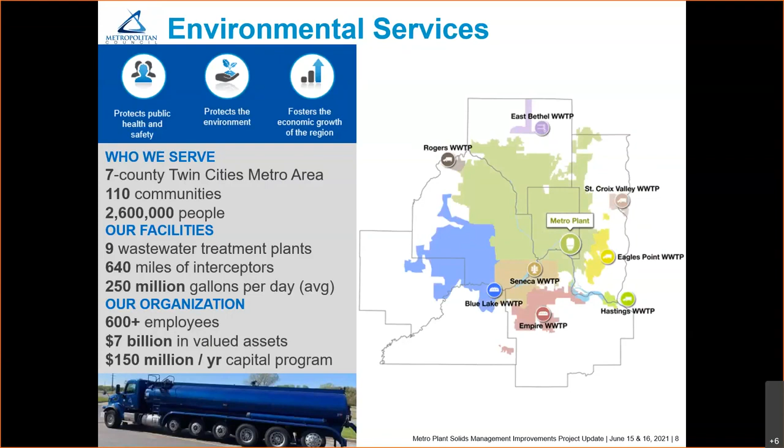The proposed project will be constructed at the Metropolitan Wastewater Treatment Plant located at 2400 Childs Road. The Metro plant treats 180 million gallons of wastewater every day, about 75% of the region's wastewater.

The Metro plant also treats about 850 wet tons of wastewater solids on a daily basis. It might be hard to imagine how much 850 wet tons is, so my staff did some calculations to help us visualize the volume.

850 wet tons is equivalent to 20 airplanes, 140 elephants, or 420 cars. The incineration process reduces the 850 wet tons of wastewater solids down to 40 tons of inert ash. The energy recovery system reduces purchases of natural gas and electricity by $2 million per year.

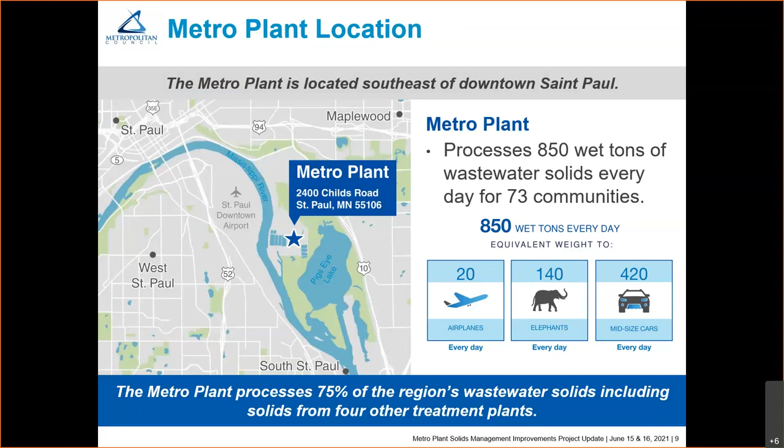The Metro plant needs additional solids processing capacity for 2 reasons: asset preservation and growth. In 2025, the existing incinerators will be 20 years old and in need of a very intensive renewal project. We estimate that the renewal work required will take about 1 year for each of the 3 incinerators. We currently do not have the capacity to take an incinerator out of service for a year. By building a 4th incinerator, we will have the capacity needed to renew existing incineration facilities.

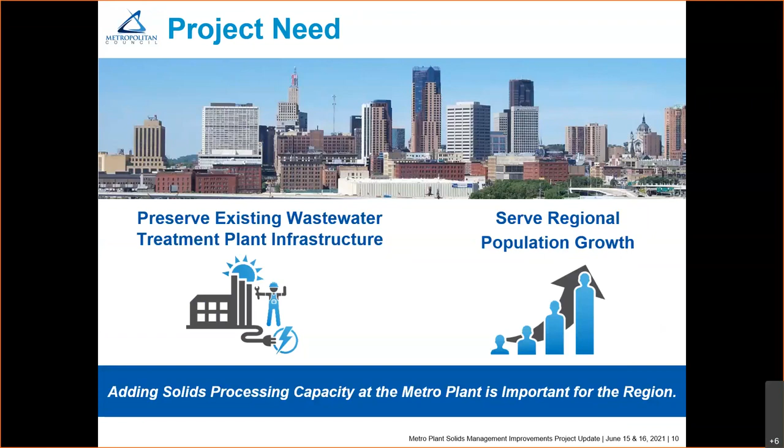Additional capacity is also needed to serve regional population growth. The population of the Metro plant service area is expected to increase by 500,000 people by 2050. While wastewater flows are historically holding steady due to water conservation efforts and reductions of inflow and infiltration, the solids generated will increase with population growth, and capacity is needed to treat an additional 215 wet tons per day by 2050. The region is growing, and MCES needs to support regional economic growth by maintaining state-of-the-art treatment facilities at affordable rates.

Currently, MCES is undertaking a minor capital project to address incineration equipment concerns. Beginning in 2024, MCES proposes to begin construction of a fourth parallel incineration train similar to our existing systems, with comparable energy recovery and air pollution control systems. An extensive renewal will then be completed on the existing incinerators 1, 2, and 3 from about 2027 to 2029. In summary, MCES will be spending roughly $200 million over the next 8 years on Metro Plant solids projects.

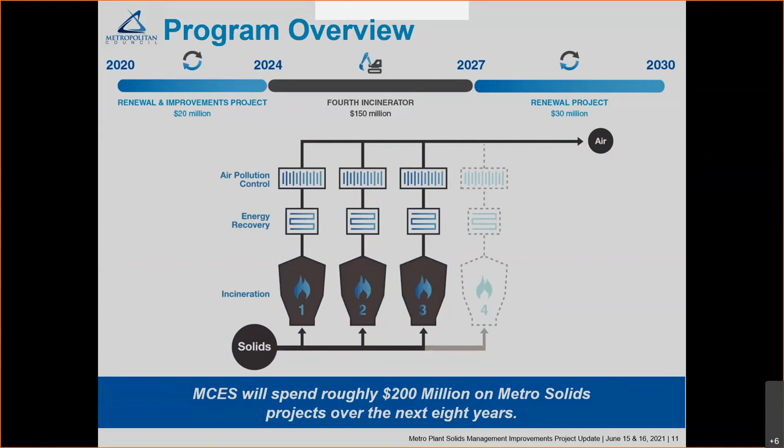Our proposed project includes expanding the existing solids management building by 21,000 square feet, as shown on this slide. The incineration equipment, shown in green, will be housed in the expansion. The stack for the fourth incinerator will be located at the same location and height as the existing 3 stacks, which are noted on the right side of the slide.

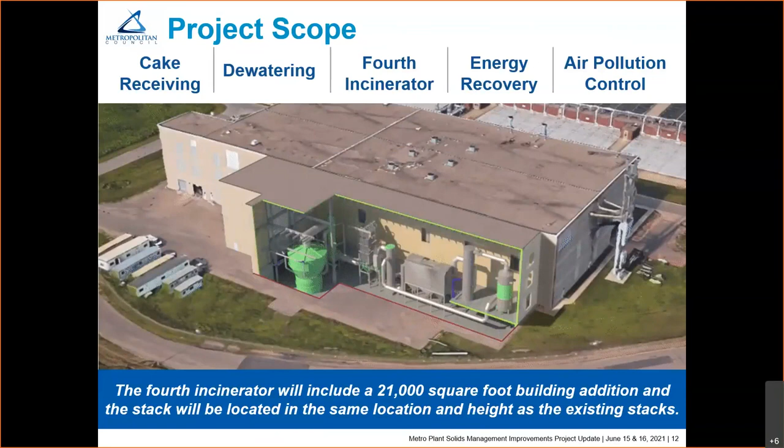The project will include additional dewatering facilities, a fourth incinerator, energy recovery including a new steam turbine generator, and air pollution control. The project also improves receiving facilities so that MCES can accept dewatered solids from the other MCES treatment plants on an emergency backup basis.

Significant outreach activities were performed in 2018 to local government entities, our customer communities, as well as our industrial customers, regulatory agencies, businesses around the Metro Plant, neighborhood districts in St. Paul, community organizations, and environmental advocacy organizations. In addition, over 4,000 mailings were sent out to residents surrounding the plant to let them know about the project.

MCES held an open house event and formal public hearing to receive public comments on the project. During the public outreach held in 2018, there were no concerns expressed with regard to odor, noise, or traffic. As part of the facility plan, an alternatives analysis was completed, which included cost and non-cost factors. The fourth incinerator was found to be the most cost-effective and sustainable alternative to meet the region's wastewater needs.

Following the public outreach and responding to the public comments, the Metropolitan Council formally adopted and approved the facility plan for the project in October of 2018. Later on in the presentation, I'll provide the address for our website where the facility plan can be viewed.

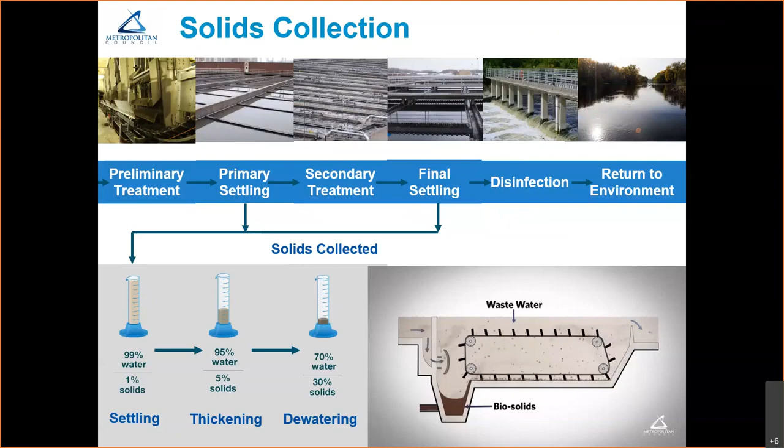The solids that are collected have a lot of value. After the wastewater solids are dewatered, they have a heating value similar to wood or low-grade coal. You probably don't want to throw our solids on your next campfire, but they do make a great renewable fuel source that is ideal for incineration.

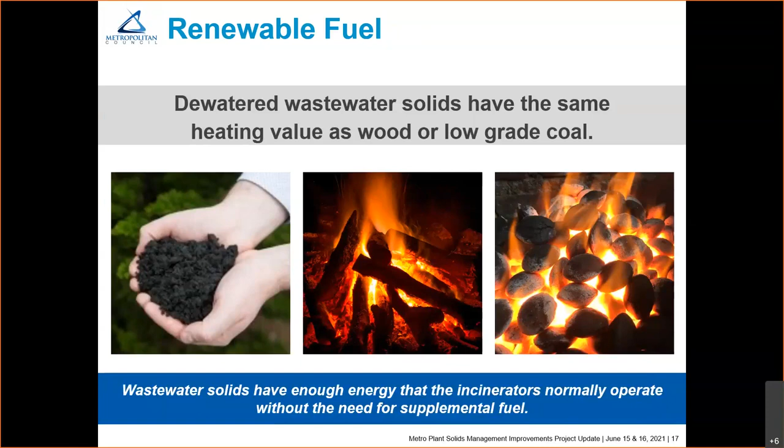At the Metro plant, we use fluidized bed incineration technology. A fluidized bed incinerator contains a bed of sand, and air is distributed under the bed, which causes the sand to swirl and act like a fluid, much like a boiling pot of water.

Once reaching a temperature of roughly 1400 degrees Fahrenheit, the solids have enough energy that the incinerators normally operate without the need for supplemental fuel. As long as the solids are fed, the combustion continues. The combustion of the solids releases flue gas containing water vapor, carbon dioxide, and fine ash particles through the top of the incinerator, which all go through further treatment.

Like Janine mentioned, MCES has to process 850 tons of wastewater solids every day, and one of the major benefits of incineration is that it makes 810 tons of that material disappear. After incineration, we're left with only 40 tons per day of dry inert ash, which is roughly 2 trucks per day. If we did not have incineration and had to add drying agents and other materials to control pH, we would end up running roughly 75 trucks per day from the Metro plant.

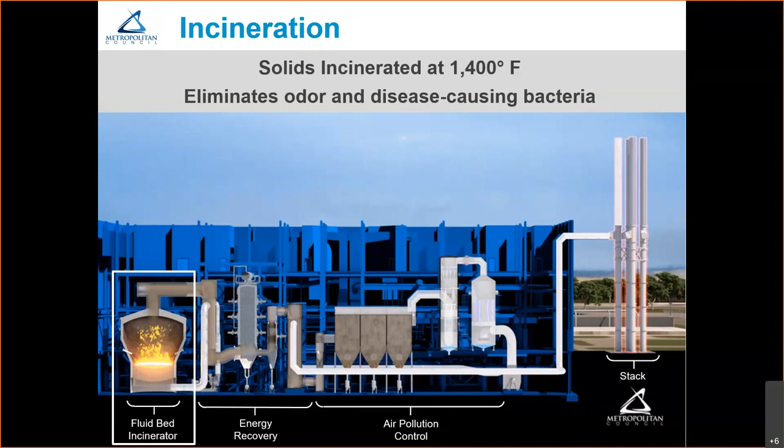Following incineration, the hot flue gas goes through an energy recovery system, which captures the thermal energy, ultimately reducing purchased natural gas and electricity. The first location where energy is recovered is at the primary heat exchanger. The heat exchanger preheats the air going into the bottom of the incinerator, minimizing the need for supplemental fuel and natural gas to maintain combustion.

The next location where energy is recovered is at the waste heat boiler, which consists of hundreds of metal tubes through which water is pumped to produce steam. During the winter months, the steam provides heating to buildings around the plant. During the summer months, the steam is sent to a steam turbine generator to generate electricity.

Electricity generation from wastewater solids at the Metro plant accounts for roughly 10% of the plant's power demand. The combined savings of purchased natural gas and electricity is roughly $2 million per year.

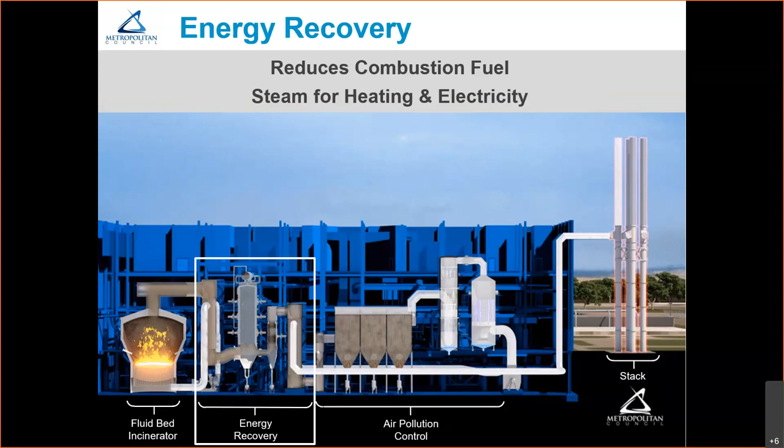Following energy recovery, the Metro plant uses state-of-the-art air pollution control equipment to meet very stringent air emission regulations. First, the flue gas goes through a carbon tower where carbon is injected to remove mercury. Next, a baghouse uses over 800 cloth filter bags to filter out particulates and heavy metals.

Next, a wet scrubber uses water cooling sprays to remove particulates and acid gases. Next, a wet electrostatic precipitator collects fine particles onto electrically charged tubes. Finally, the gas travels through a heat exchanger, which removes any remaining moisture, and then out the stack.

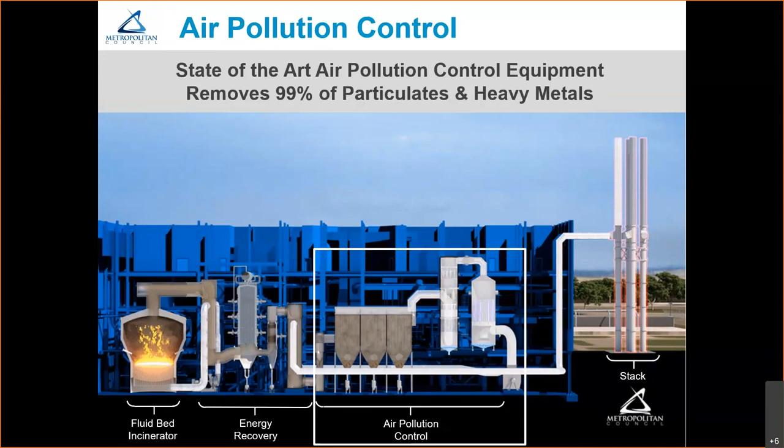All in all, the air pollution control system removes over 99% of all the particulates and heavy metals leaving the incinerator. The emissions leaving the stack are clean, colorless, odorless, and have no visible plume. And with that, I'll turn it over to Renee to talk about the air permitting and environmental review.

Thank you, Stephen. My role is to present some of the preliminary design work, including evaluations we completed to obtain an air permit for the fourth incinerator and the evaluations we completed for environmental review.

MCES recognizes that neighborhoods surrounding the metro plant include environmental justice areas identified by the Minnesota Pollution Control Agency, or the MPCA. This map is from the MPCA's website. 40% or more of the residents in the blue areas reported income less than 185% of the federal poverty level. 50% or more of the residents in the green areas are people of color.

Using the MPCA's framework to evaluate environmental impacts of the fourth incinerator project, we found that this project will have no significant detrimental impacts to surrounding communities. These evaluations, which are included in the application to modify the plant's air permit for a new incinerator, and the Project Environmental Assessment Worksheet, or EAW, will be independently reviewed by the PCA.

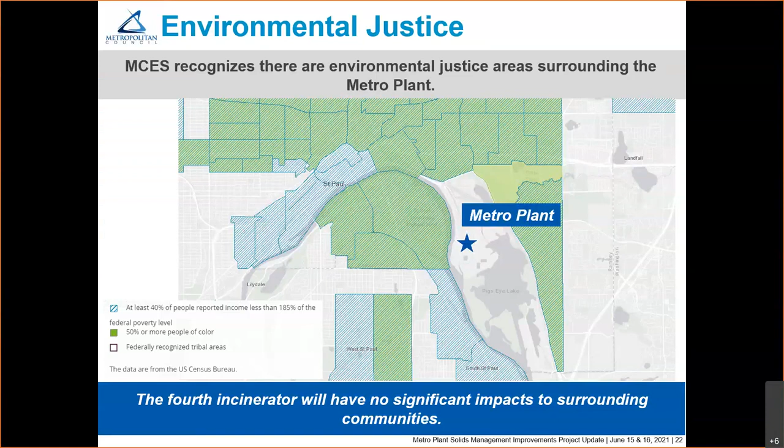As part of the air permit amendment, before the fourth incinerator is constructed, MCES must demonstrate through computer modeling that after construction of the project, the metro plant will continue to meet national ambient air quality standards at the plant property boundary. National ambient air quality standards have been established by the Environmental Protection Agency for six criteria pollutants for the protection of human health and the environment.

Our preliminary modeling results indicate that the metro plant will continue to meet all national ambient air quality standards and that the project will have no significant impact on the air quality for surrounding communities. These modeling results will be updated in the near future because the PCA is updating the modeling requirements.

If you look towards the bottom of the criteria pollutants, PM2.5 is small airborne particulate matter, or material with a diameter less than or equal to 2.5 microns. PM10 is particulate matter with a diameter less than or equal to 10 microns. On the next slide, I'm going to talk a little bit more about the particulate matter pollutants.

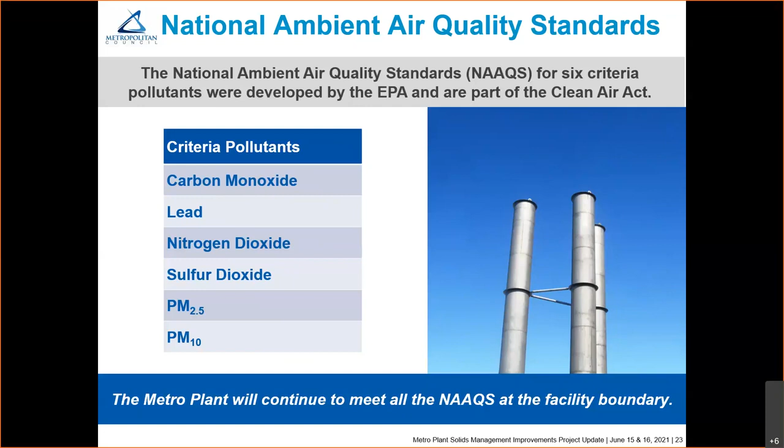The graph on the left side of this slide shows a gradation of micron particle sizes from the smallest, a smoke particle at 0.5 microns, to the largest, a coffee ground at 400 microns. A PM10 particle is about the size of a pollen particle. Breathing in large concentrations of PM10 can damage your lungs, and that's why there's an air quality standard in place for PM10.

In 1994, the blue area shown on the map surrounding the metro plant and other industries was above the national ambient air quality standards for PM10. The area includes Childs Road and Red Rock Road. When an area exceeds a national ambient air quality standard for any given pollutant, the PCA identifies the area as non-attainment for that pollutant.

In response to non-attainment for PM10, the MPCA developed a State Implementation Plan, or SIP, which is a collection of regulations and requirements for the area to bring it back below the National Ambient Air Quality Standard for PM10. Emissions reductions successfully brought this area back into attainment for PM10 in 2002.

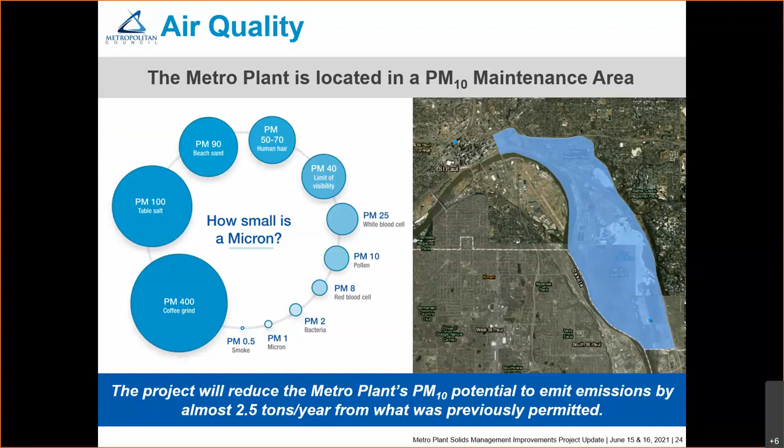The existing Metro plant incinerators have an exceptional track record of environmental compliance, and MCES is proud of their performance. The incinerators have performed so well that emissions data from the Metro plant were used by the EPA in establishing new, more stringent standards specifically for incinerators in 2010.

In 2010, the EPA set new air emission standards for existing sewage sludge incinerators constructed before 2010, and even lower standards for incinerators constructed after 2010. These standards are based on treatment technology and are separate from the National Ambient Air Quality Standards presented previously. The existing incinerators at the Metro plant were constructed in 2005, so the standards for existing incinerators apply.

This graph shows our existing emissions compared to the new incinerator standards. The pollutants of concern are listed along the x-axis: total suspended particulates, carbon monoxide, sulfur dioxide, etc. Each standard or limit is represented as 100%, the dark blue dashes at the top of the graph. For each pollutant of concern, our emissions, the dark blue bars, are a fraction of the new standard.

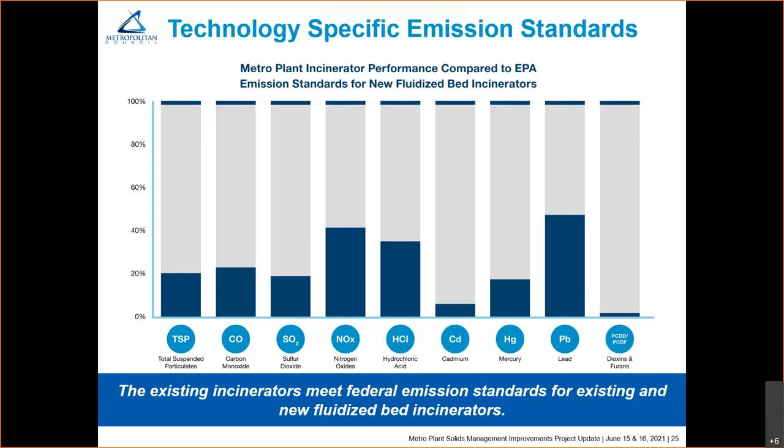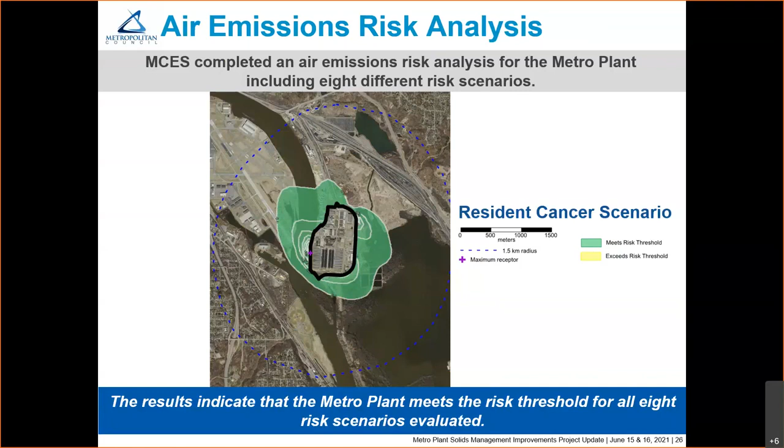Next, I want to talk about greenhouse gas emissions from incineration of wastewater solids and also wastewater treatment plants. Greenhouse gas emissions from the 4th incinerator are partially offset by the energy recovery equipment that Stephen presented earlier. However, the real point is that wastewater treatment as a whole contributes very little greenhouse gas emissions in the overall scheme of things.

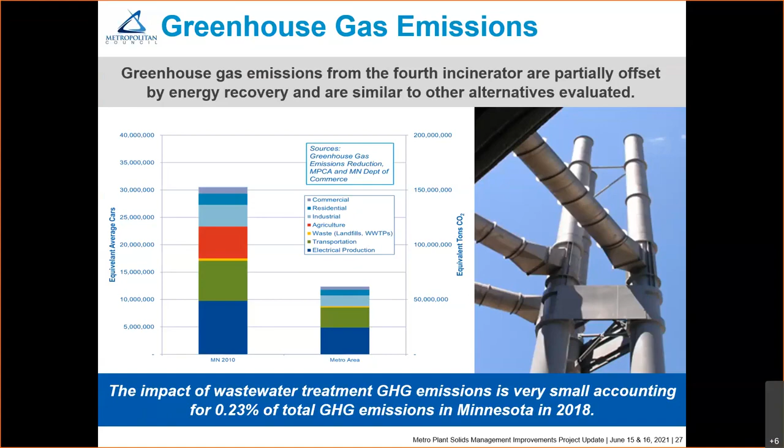Incineration technology at the Metro plant has been a key factor in reducing odors from the Metro plant. Before the fluid bed incinerators were installed in 2005, the Metro plant received about 70 odor complaints each year. After the fluid bed incinerators were constructed and with odor control improvements around the plant, the number of odor complaints reduced to 0. We don't really receive any odor complaints these days.

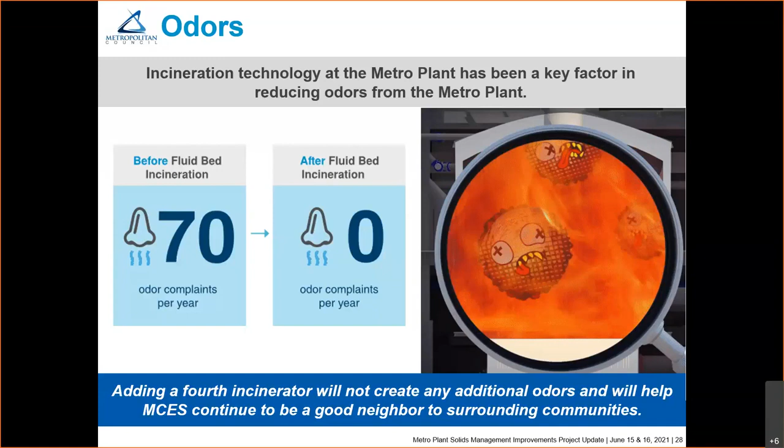Adding a 4th incinerator will not create any additional odors and will help MCES continue to be a good neighbor to surrounding communities.

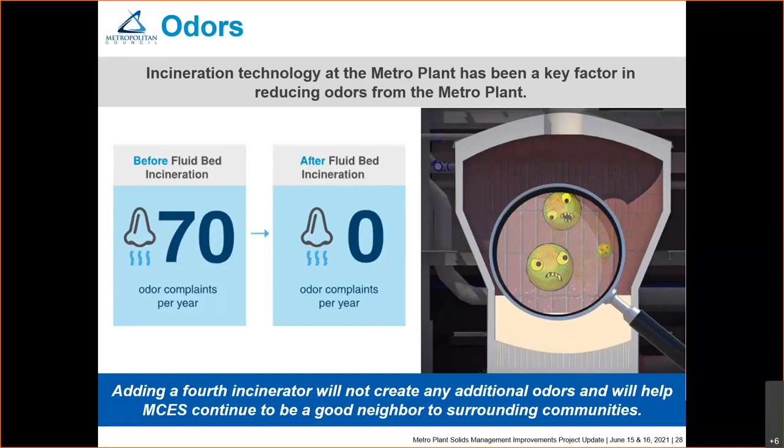The impact of the project on water quality is also a question to fill in on the environmental assessment worksheet. The Metro plant is located next to the Mississippi River and Pig's Eye Lake. The Metro plant has played a key role in improving water quality in the Mississippi River since its construction in 1938. The Metro plant has 8 consecutive years of perfect discharge compliance.

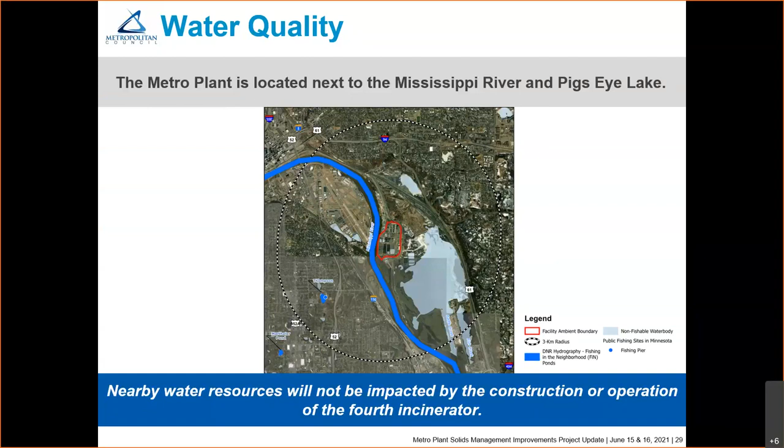Although this project does not directly impact liquids treatment, the addition of solids processing capacity at the plant will help minimize the risk of not being able to collect and remove solids from the liquids treatment system. There are no proposed changes to the liquids or stormwater discharges as part of the project, and nearby water resources will not be impacted by the construction or operation of the 4th incinerator in either the short term or the long term.

Adding a fourth incinerator will require a major amendment to the Metro Plant's air permit. After the MPCA reviews the application for a permit amendment, they will issue a public notice, potentially a public hearing on the amended air permit, and then issue an updated air permit for the Metro Plant.

Since the Metro Plant is located in the SIP maintenance area, the project will likely require SIP review by the EPA. Once the EPA reviews the SIP, they will publish the proposed revision, if any, in the Federal Register and then approve it. The environmental assessment worksheet is not required for this project, but MCES will voluntarily submit one to

the MPCA to provide full transparency regarding the project. The purpose of the EAW is to disclose potential environmental impacts of those projects that may have significant environmental impact and to identify mitigation measures prior to construction or permitting. After the EAW is reviewed by the MPCA, they will issue a public notice, again, potentially a public meeting.

The MPCA will decide if additional work is needed or if an environmental impact statement, EIS, is required. If an EIS is not required, the MPCA will issue what is called a negative declaration supporting why an EIS is not required, along with the findings of fact.

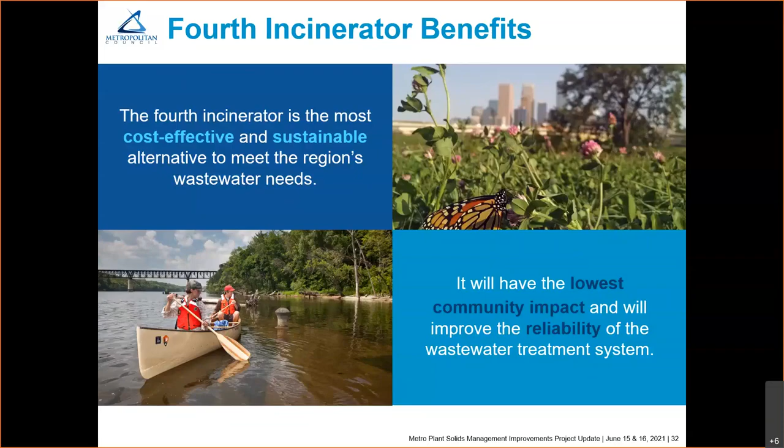And so there are many ways for you to learn more about the project or to provide feedback. You could visit our project website, at www.metrocouncil.org/metrosolids. You could email our project team at info@metrosolids.com. You could leave a comment on our project comment line at 651-691-9124, or you could send any written comments via mail to our Robert Street address in St. Paul, 390 Robert Street North, St. Paul, Minnesota,

55101. And as Renee mentioned, there are 2 future engagement opportunities, which will be held by the Minnesota Pollution Control Agency. Those will be for the separate public notices for the air permit amendment and the environmental assessment worksheet, and we expect that to be towards the end of this year or early next year. And with that, I'd like to turn it back over to Chair Lindstrom.